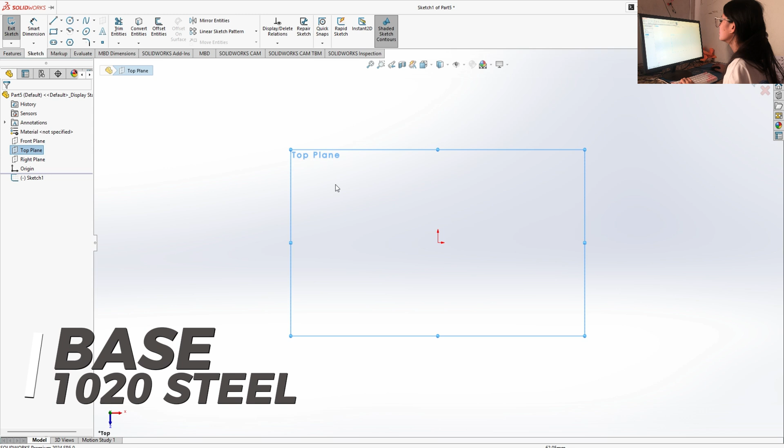First, we're going to select the top plane. Then sketch. Make a corner rectangle from the origin with a length of 56 mm and a width of 112 mm. Then extrude that part to blind, then 14 mm. Click enter.

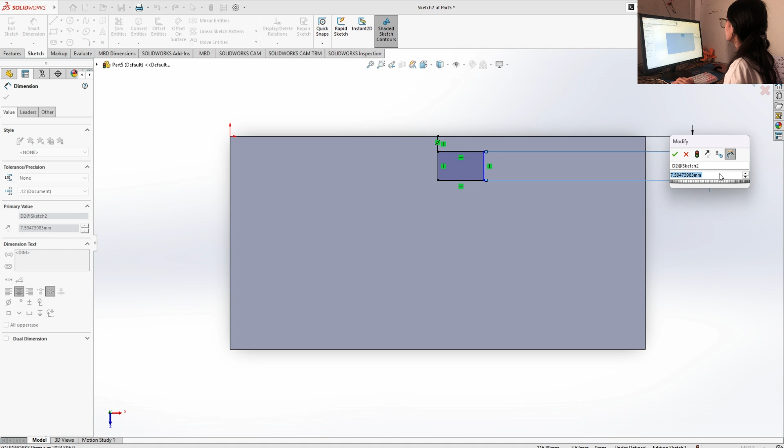Then we're going to sketch at the top surface of that rectangle. Make a little line with a dimension of 4 mm. Then make another corner rectangle with a length of 8 mm naman. Then we're going to extrude that part again to 14 mm.

Sketch on the front surface. We're going to ... natin ng konti yung perspective. Then we're going to make a line, a vertical line, yung haba niya is 78 mm. Then we're going to make a circle at the end of that line with a diameter of 56 mm.

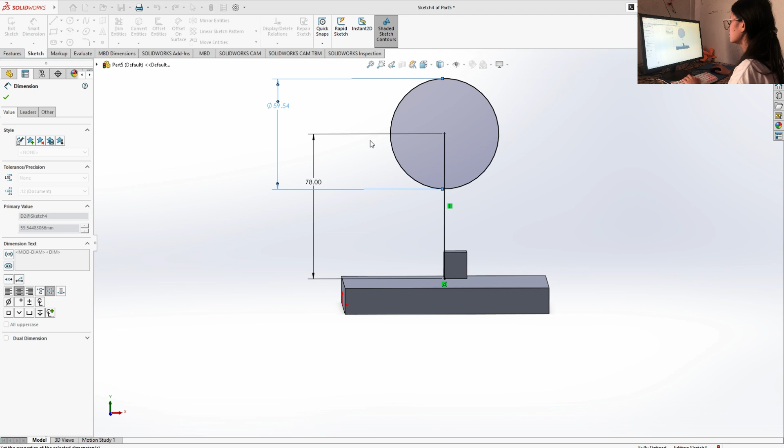Then we're going to make a line up to the end of our extruded rectangle kanina. Yan, 56, 56, both. Hanggang end, dapat mag-equal siya. And dapat sagad siya dun sa surface. If hindi, mali yung dimension mo. Then we're going to connect that to our circle. Make sure na may relationship sila na tangent. Yan.

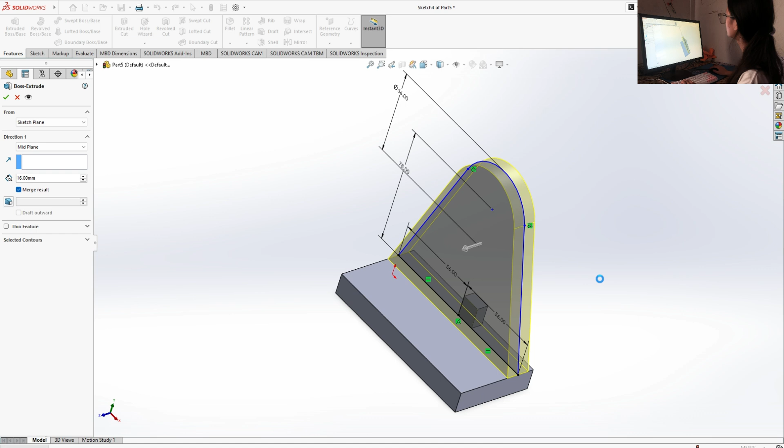Then trim natin yung mga nasa gitna, yung mga necessary parts. We're going to extrude now that part mid-plane. Ayan, 16 mm. Then click enter na. We're going to sketch again on the front. Make a circle up to that center. Then extrude that part to 5 mm blind.

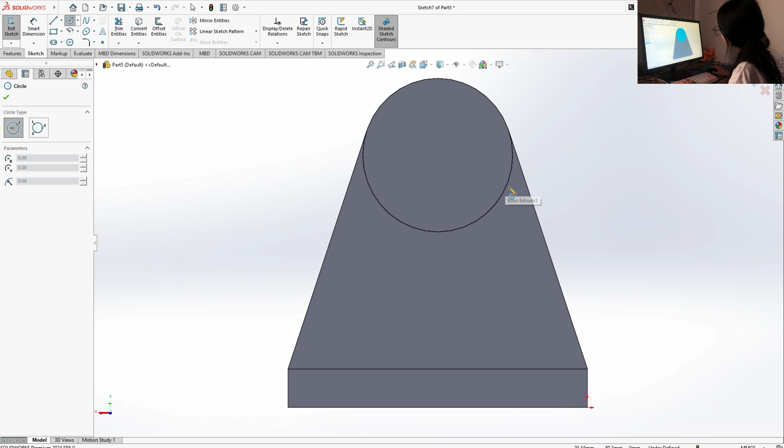Again, yung sa likod naman, make a circle again. There, we're going to extrude that part ulit to 5 mm. Then we're going to sketch again dun sa bilog na ating in-extrude. Ayan. From the midpoint, make a circle again, a small circle with a diameter of 25 mm. Then we're going to extrude cut, bubutasan natin siya, so ito through all natin.

Then, punta na tayo sa, ayan, dyan sa plane na yan. We're going to sketch yung sa baba. Then, may length siya na 56 mm. Then from yan sa baba, meron ulit siyang haba na 32 mm. Ang gagawin natin dito is yung nasa gitna ng ating base. Yan.

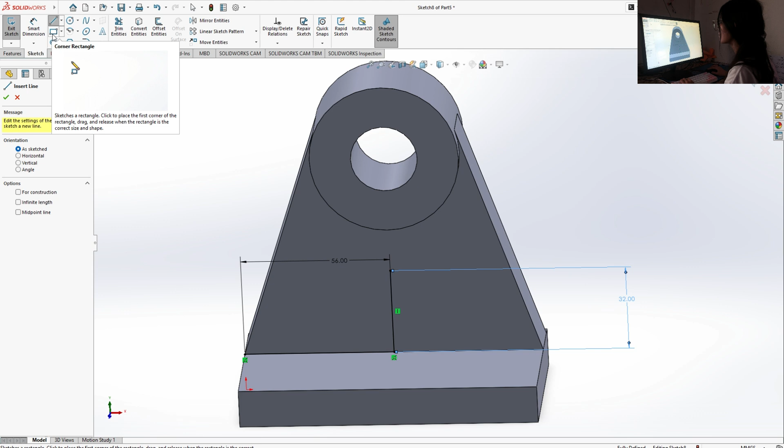Going to make a line. Yung sa kabila din, we're going to make a line that resembles a rectangle. Ayan. Then, lalagyan natin siya ng dimension. 6 mm for the width. Pareho. Then, trim that part, yung gitna. We're going to extrude that now to 36 mm. Ayan. And click enter.

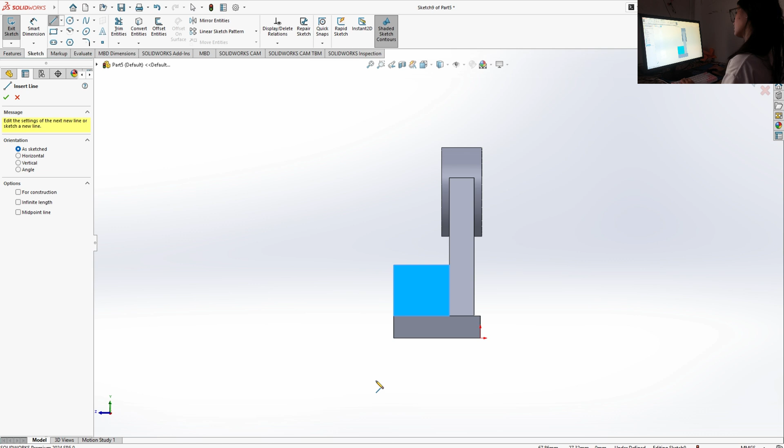We're going to sketch dun sa right side ng ating in-extrude para magawa natin yung parang triangle. Yan. Sketch. Buuin natin yung triangle para ma-extrude natin yung part na yun. Through all ulit. Ayan. Then, magbubutas na tayo sa taas na part. Sketch again.

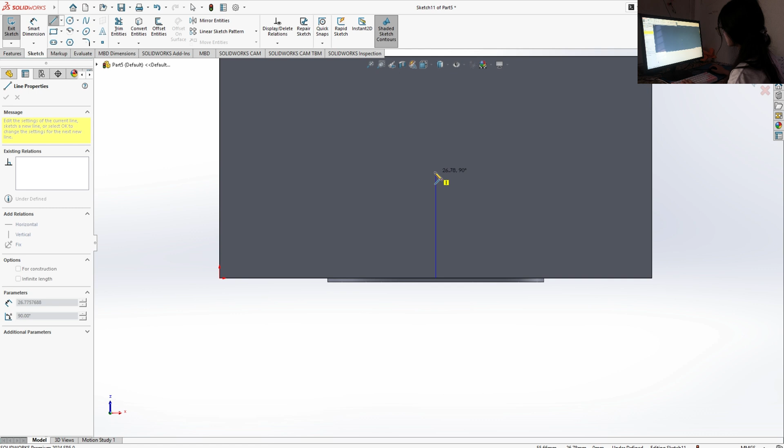Then, going to make a line. Yan, nahanap natin yung mid. Hanapin mo yung midpoint. Yan. Make a line there, with a length of 38 mm. Then, this length naman is 44 mm pareho.

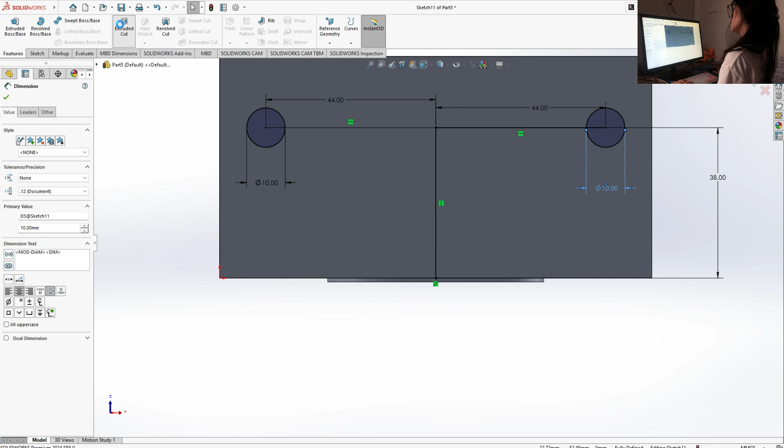Hindi pa pala tayo magbubutas. Magbubutas muna tayo sa baba bago sa taas. Ganyan. Yung dalawang baba, yung butas niya is 10 in diameter pareho. Yan. Then we're going to extrude cut that part again through all para mabutasan. Yan.

Yan, pumunta na tayo sa top plane. Bubutasan na natin yung taas. Again, sketch. Make a line. Make a line, then ang haba niya is 13 mm. Then make a circle na, yung maliit lang, with a diameter of

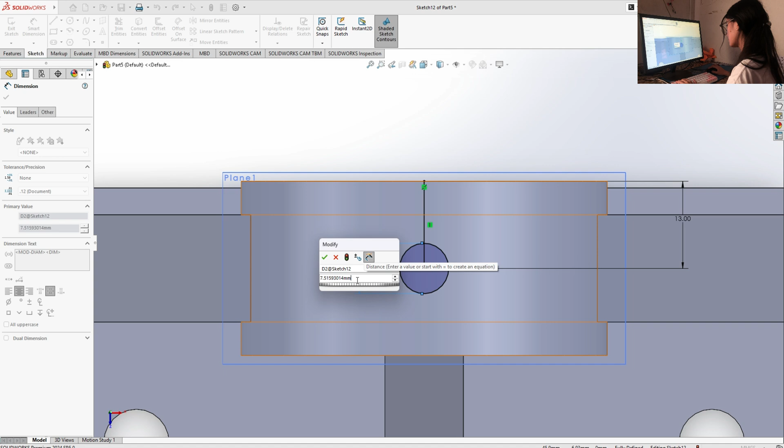8 mm. Ayan. And we're going to extrude cut that, not through all, only up to next, para hindi mabutas hanggang baba ng ating base. Ayan. Hanggang dun lang siya pag up to next. Then we're going to fillet, 3 mm radius. Make sure na 3 mm yung ating size ng fillet.

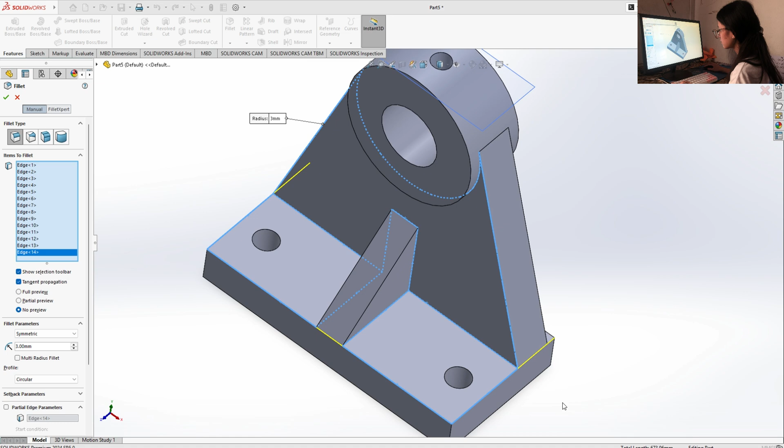And yan, click all the parts that need the fillet. Ayan, yung mga edges. Make sure na wala tayong makakaligtaan. Don't forget the back of our base.

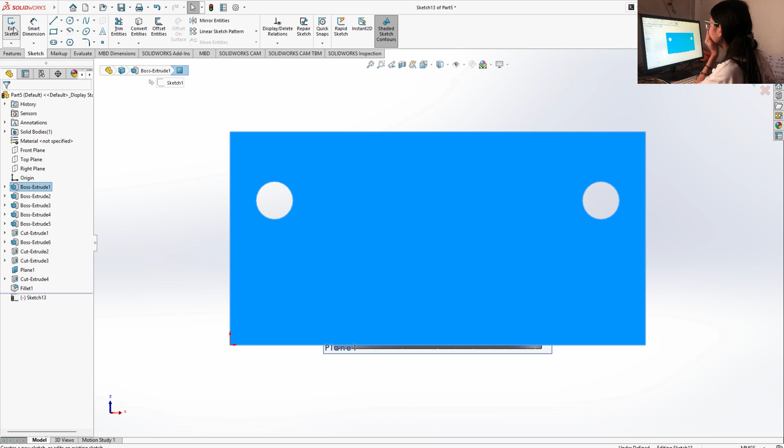Ayan. Then now we're going to make a dimension again sa ilalim ng ating base. Going to create a line from both ends. Meron siyang haba na 22 mm pareho at both sides. Then we're going to make a corner rectangle. Ayan. End to end siya nung ginawa nating line.

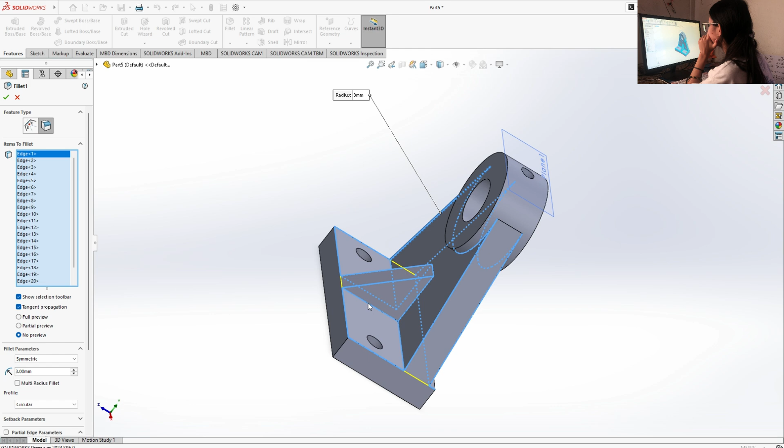Then we're going to extrude cut that part blind. Papalitan natin siya ng blind and 3 mm only. Ayan, ganyan dapat ang magiging itsura niya. And then I'm going to edit the fillet part kasi I'm going to add a fillet. Hindi ko na ma-edit yung fillet since hindi nakasama yung ginawa natin.

Kaya I recommend na gawin muna lahat yung needed parts before doing fillets. Ayan. So, we're going to fillet yung ilalim niya.

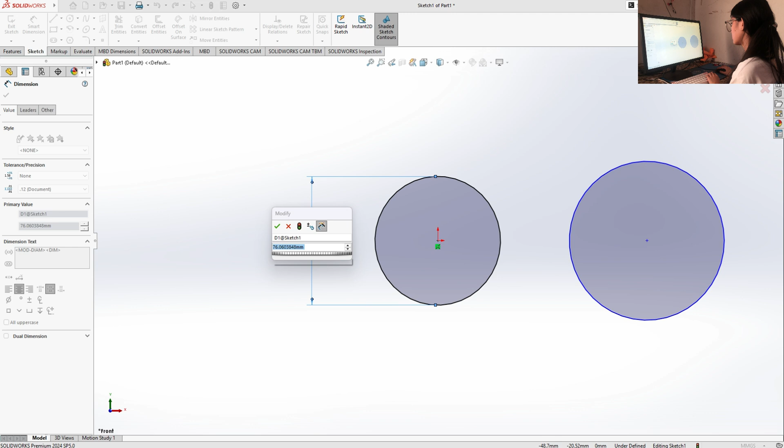Yan na. Now, to start the pulley arm, click the front plane again, then make two circles at the origin. The first circle should have a diameter of 52 mm. The other circle has a diameter of 56 mm. Then connect the top center of those two circles, pati also yung baba.

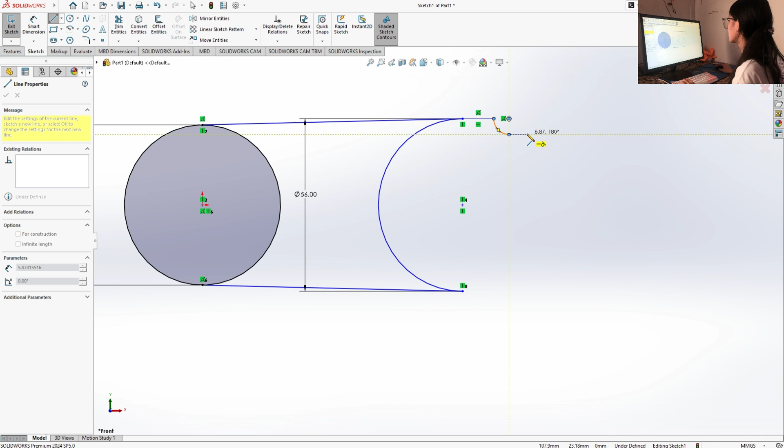Yan ulit. Then, yung baba rin. Connect those. Then, trim the half part of the second circle, yung mas malaking circle. Then, we shape this, follow this sketch to shape yung tabi nun. Then, yan. Click A for arc. Then, A again for the arc.

Then, after that, we put a relationship between those two lines. We make them equal. These two also equal. Then we can now smart dimension it. From this point up to this point, the arc should have a 4 mm length. This one has a 48 mm length.

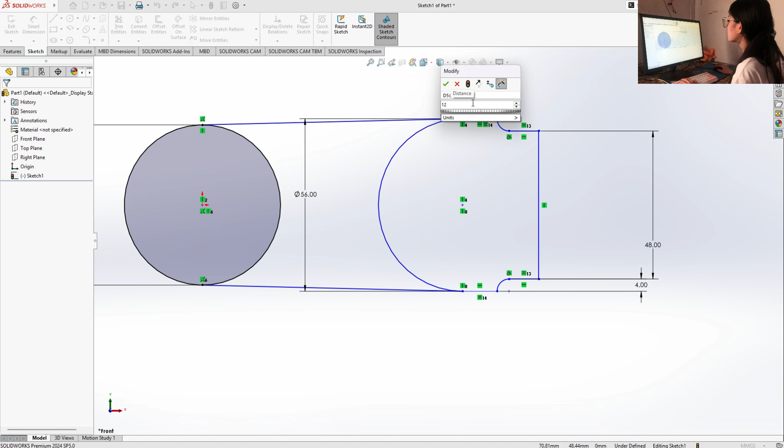This part will have... medyo naglag. So this part will have 12 mm length. See that nag-adjust din yung sa baba since they have an equal relationship. So the other one is 26 mm. After that,

I'll put another circle at the center line with a 25 mm diameter. A center line upon that point to the end line, and I make a line up in between of the center line. So yung layo nila is 2 mm, both lines from the center line, 2 mm up to center line. Then I'll trim those unnecessary parts, shape of pulley arm.

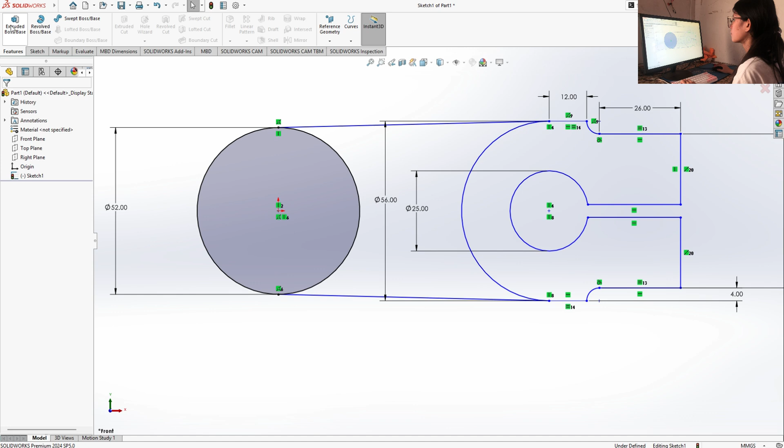Then I can now extrude this part by 6 mm. 6 mm yan. Then check the direction 2, then also 32 mm. Both are in blind. Then the center part, blind it, reverse that part. It is blind in reverse. Extrude it at 14 mm.

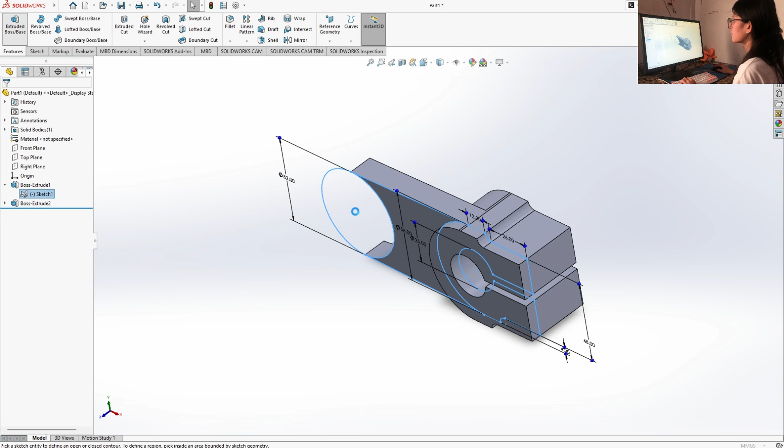Then yung unang circle, extrude it to 6 mm naman. For direction 2 is 20 mm, yung kabilang side. Don't forget that. Then, on the first circle, I'll sketch a circle with a diameter of 25 mm. Then, I'll extrude cut that part through all. Bubutasan ko siya. Yan.

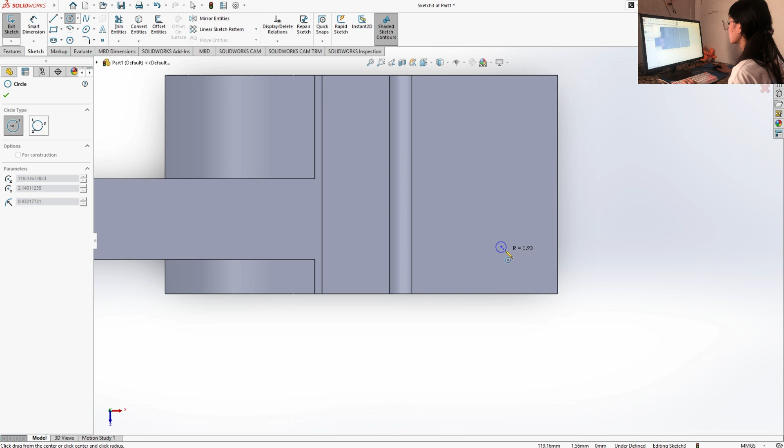Then, I'll sketch on this part of our pulley. I'll make a circle in there with a diameter of 12.22 mm, and yung layo nila is 12 mm. Yung layo sa baba is 14 mm, yung height niya 14 mm, yung width niya is 12 mm. Then bubutasan ko ulit siya, extrude cut through all. Yan, butas siya hanggang sa baba.

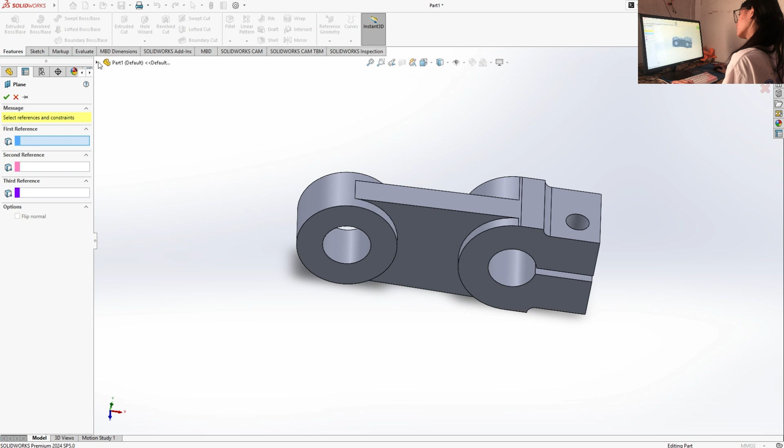Then, I'll go to sa ibang plane naman, sa right plane. Then, I'll sketch on this part. Maglalagay ako ng circle. Bubutasan ko yung gitna niya. May diameter siyang 8 mm. At yung height, yung distance niya is 13 mm, yung layo niya dun sa right side. So, ayan. Extrude cut na, up to next, para hindi butas hanggang dulo.

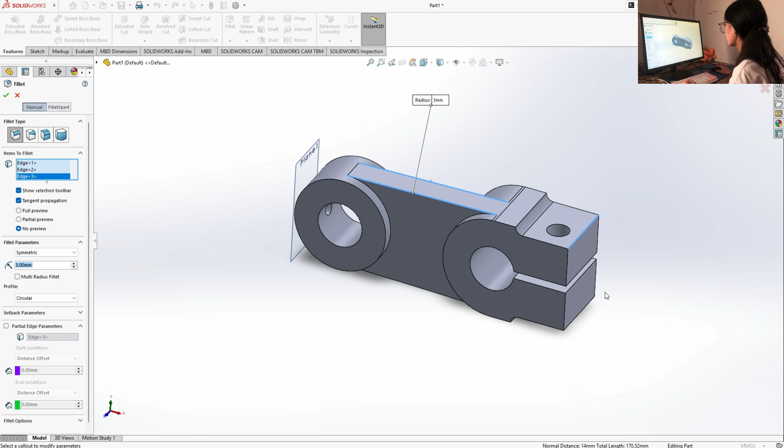Then, we can now fillet yung mga part na yan. Again, 3 mm yung fillet niya. Make sure na wala tayong makaligtaang fillet. Ayan. If you make sure na okay na, click enter or check.

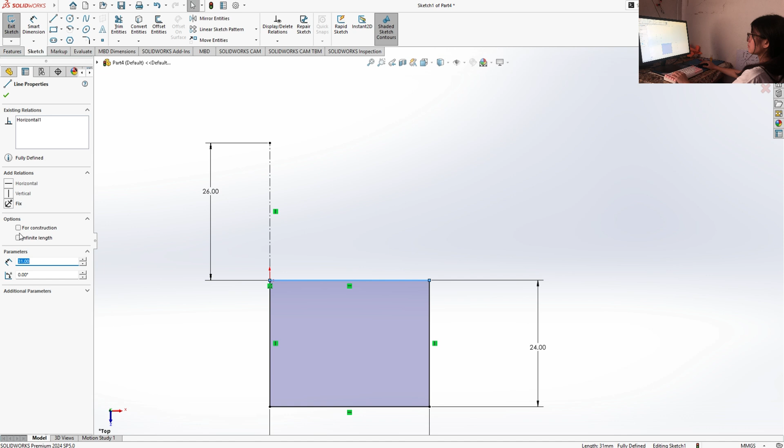For our third component, a pulley, we're going to start at the top plane. Again, make a corner rectangle. May length siya na 24 mm and the width of 31 mm. Ganyan dapat siya from the origin. Then, make a center line up from the origin, a vertical line with a length of 26 mm naman. Then, yung taas ng line na yan, we're going to make it for construction. Make it as a center line.

Then, offset that part by 10 mm. Then, I'm going to trim this unnecessary part sa loob. Then, that part, I also make that a construction line. Yung layo dapat nila is 10 mm. Going to insert a line. Just follow this sketch muna. This will serve as the outline as we revolve our pulley.

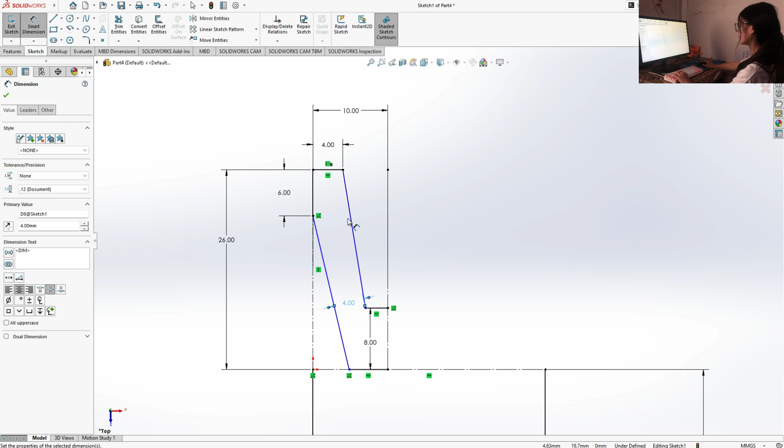Then, 6 mm, 4 mm. For that is 8 mm. And this inclined line, the distance between the two inclined lines is 4 mm. And the inclined angle should be 15. I'm going to mirror that part. And click check.

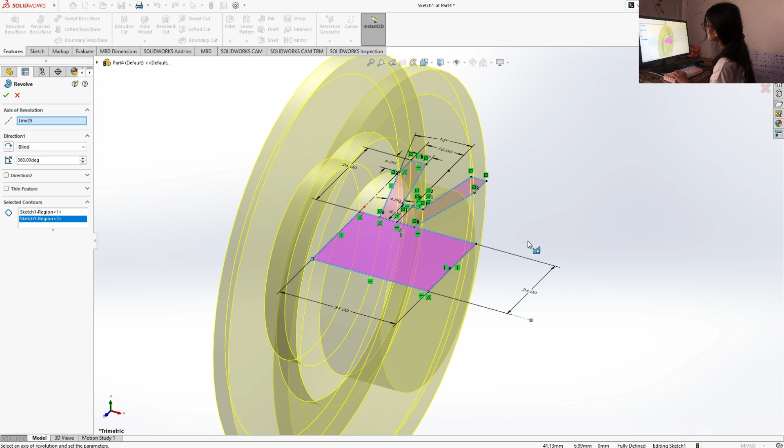I'll make a center line again. That will serve as my axis para ma-revolve ko yung ginawa kong sketch. So, yan yung end output ng aking ginawang sketch. Then, sketch on that part. Make a circle. Bubutasan natin siya. 30 diameter. Through all. Again. Butas na siya.

Should look like this. Then, we're going to fillet na. 3 mm ang ating fillet. Again, ganyan.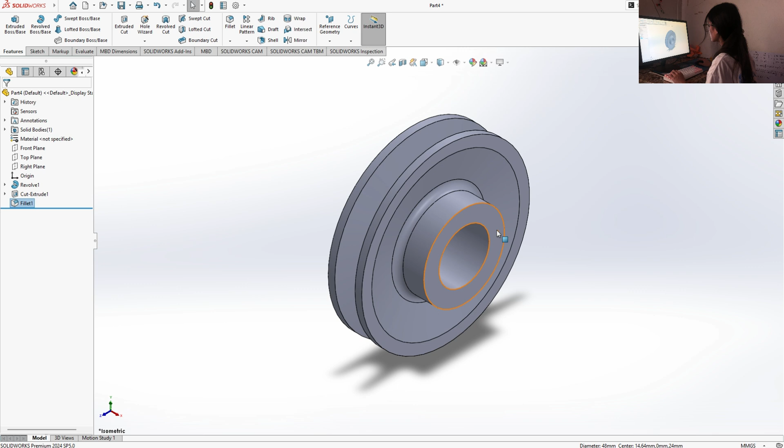Create at the front plane and make a circle from the origin with a diameter of 44 mm. Then we're going to extrude that part to 16 mm blind. Sketch on this part. Make a circle again, a smaller circle with a diameter of 25 mm naman. Then we're going to extrude cut that part through all.

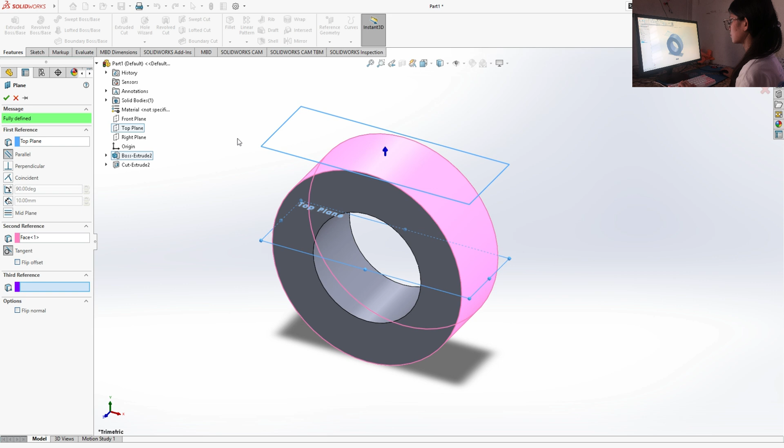Yan, para mabutasan natin. Then, punta tayo sa top plane. Sketch tayo sa top plane. Make a circle, yan sa gitna, with a diameter of 8 mm. Yung layo niya from the edge is 8 mm rin. Extrude cut that part up to next para hindi butas hanggang baba.

Then, we're going to chamfer that part instead of fillet. Only 1 mm in radius. This part. Those parts.

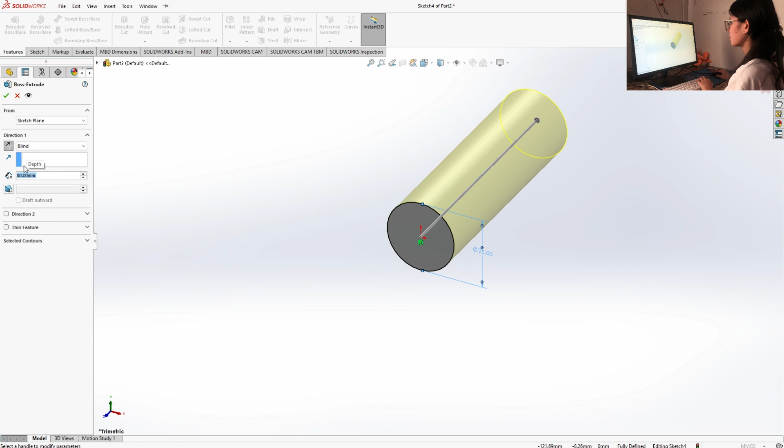Dito naman tayo sa arm shaft. First, punta tayo sa front plane. Make a circle, may diameter na 25 mm. Then, extrude that part. Blind. Ang haba niya is 80 mm. Then, after that, pupunta tayo sa top plane. Gagawin natin yung butas sa top plane.

Sketch on that part. Going to make a circle, yung may dimension siya na 8 mm only. Yung distance niya from the edge is 80 minus 67. You can type that na, if ayaw mo muna mag-compute.

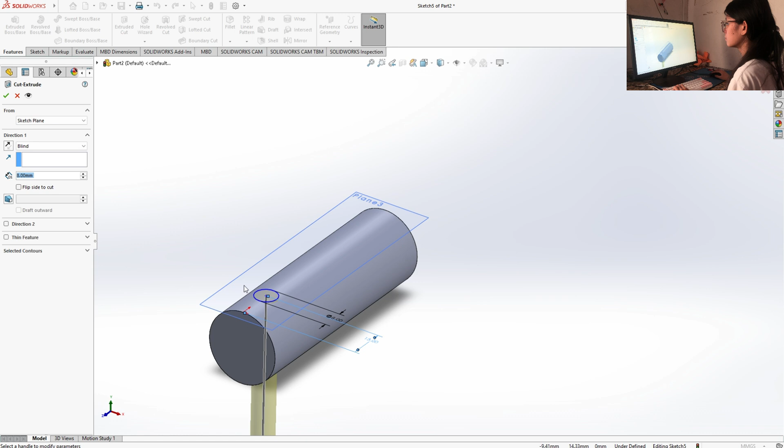Bubutasan na natin siya. Extrude cut, blind 8 mm only. Hindi pala siya sagad yung butas niya. Then chamfer na 1 mm yung magkabilang dulo ng ating arm shaft.

Doon naman tayo sa ating pulley shaft. Again, sa front plane tayo. We're going to make a circle, diameter ng 25 mm. Again, we're going to extrude that part. I-reverse natin siya, sa kabila tayo. May haba siya na...

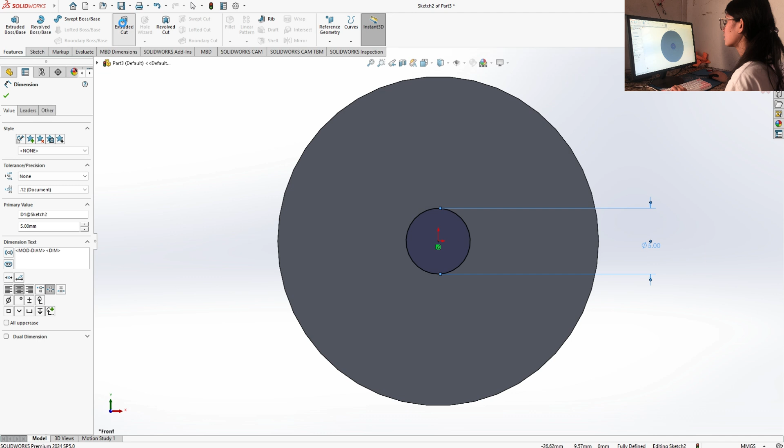And we're going to sketch na dun sa harapan ng circle. Make a small circle lang, and diameter niya is 5 mm only. Extrude cut that part. Hanggang 50 mm lang yung kanyang butas.

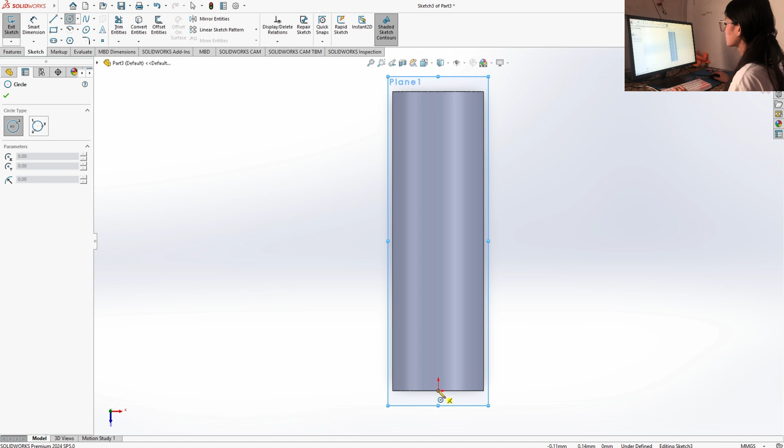Then, punta naman tayo sa top plane natin. Bubutas ulit tayo sa ating top plane. Sketch. Then, we're going to make a circle. Magkabilang dulo. Hanapin natin yung midpoint ng edge. Then, we can make a circle na may diameter na 8 mm, both.

Then, yung layo nila is 13 mm, na yung in between na distance nila is 54 mm. Then, we're going to extrude cut on those two circles to 6 mm only. Blind. Make sure it is in blind.

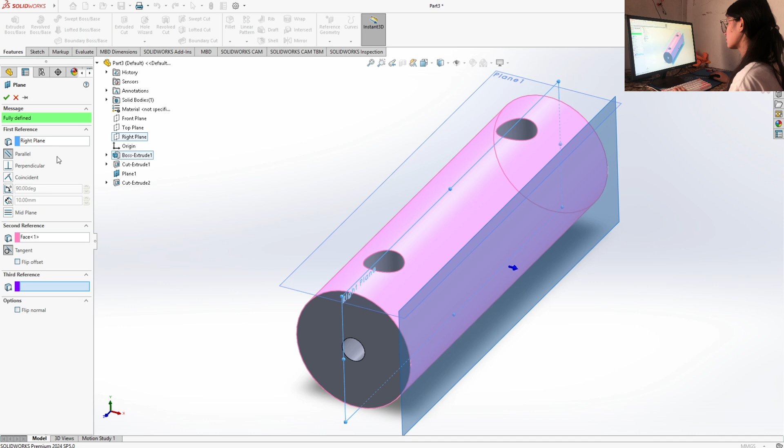Then, punta na tayo sa right plane. Sketch on that part and make a circle. Isang circle lang, may diameter na 5 mm siya. Yung distance niya from that edge is 40 mm. Extrude cut, blind 14 mm.

Chamfer natin yung magkabilang edge ulit ng ating pulley shaft.

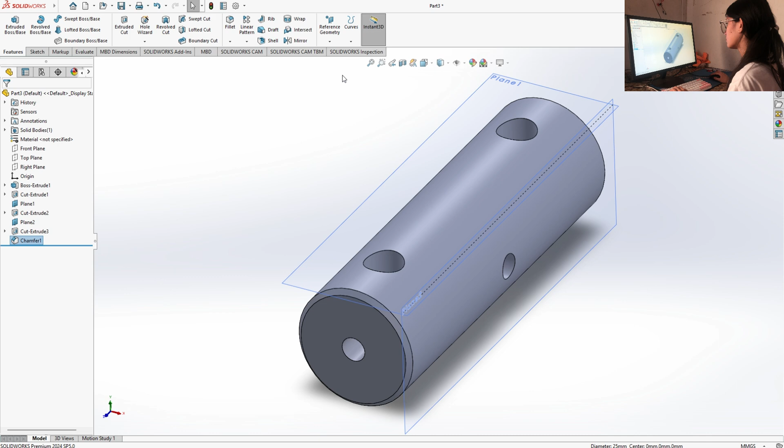Let's move on to our 7th component called bushing. Sa front plane, make a circle. Another circle sa gitna, yung smaller circle. Yung outer circle, may diameter siya na 30 mm, and then yung isa is 25 mm. And we're going to extrude that part. Dapat ganyan.

We're going to reverse the extrusion. Yung thickness niya is 31 mm only. Dapat nasa right siya.

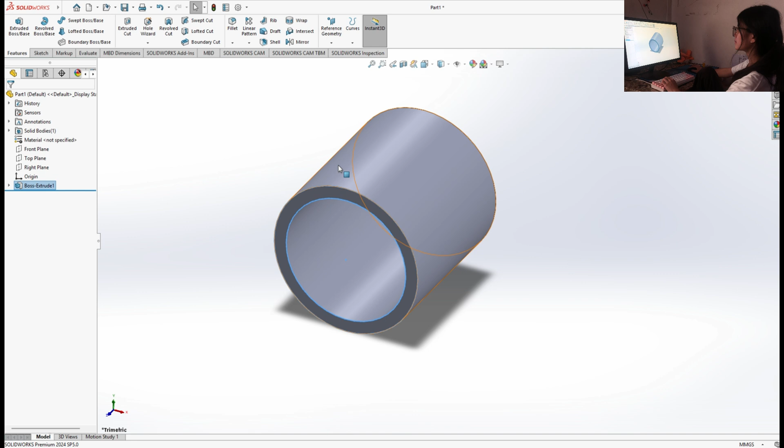Then, dito na tayo sa ating hex bolt, yung parang screw. Make that shape. Yung length niya is 20 mm. Extrude that part to 8 mm blind. Then, mag-sketch tayo dito sa front surface niya na circle, may diameter siyang 12 mm. Then, we're going to extrude that circle to 70 mm. Yan yung haba ng ating hex bolt.

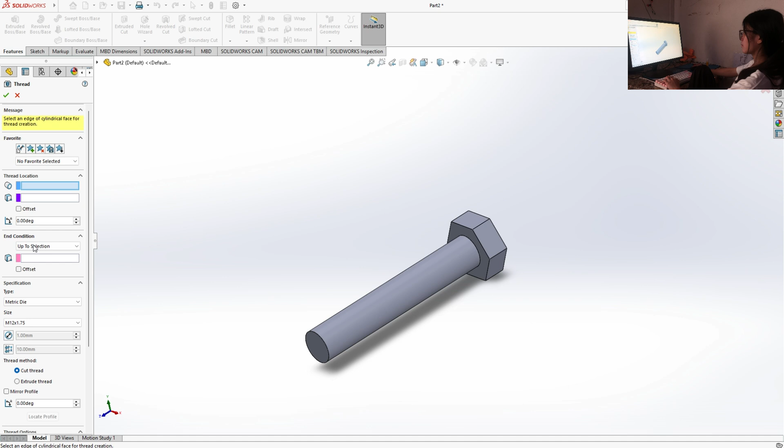Magta-thread na tayo. Make sure it is in metric die, kasi sa labas. Then, M12 by 1.75, yun yung kanyang size. Sa edge, click the edge for the blue part. Then, the pink part, yung end edge.

Naman tayo sa ating square nut. To start that, sketch tayo sa front plane. Make a center rectangle, and from the origin tayo lagi. Yung length niya is 20 mm, yung width niya is 20 mm. It's 20 by 20 mm. Extrude that part to 8 mm blind.

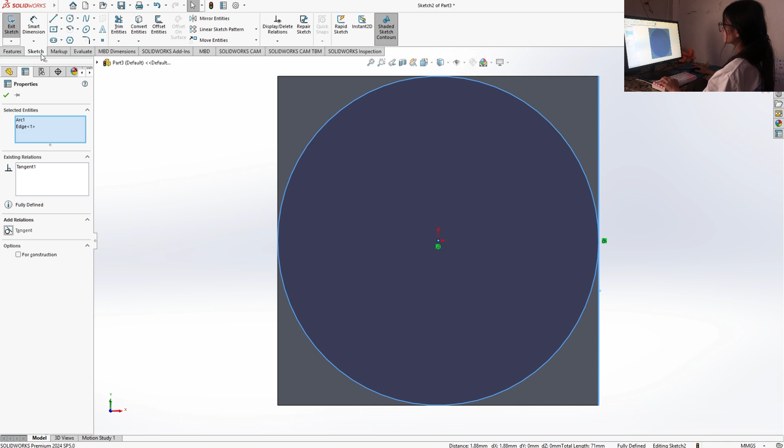We're going to sketch on this surface. Make a circle. Kailangan meron silang relationship na tangent, yung edge ng circle at yung edge ng in-extrude natin. Then, we're going to extrude that through all. Check natin yung flip side to cut para yung tabi lang yung matapyas. Then, make a circle dyan, maliit na circle, 12 mm in diameter. We're going to extrude cut that through all.

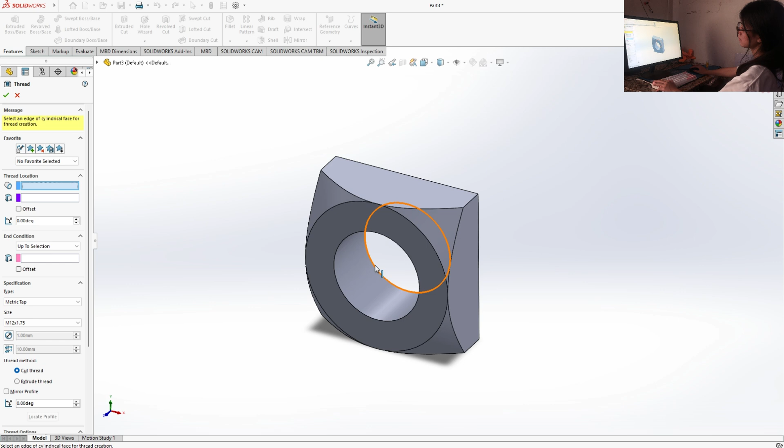Mabubutasan natin. Then, lalagyan natin ng thread yung loob. Metric tap, dapat sa loob. M12 by 1.75 ang size niya. And click both ends, yung top edge niya. I-offset natin siya ng 2 mm sa both start and end condition.

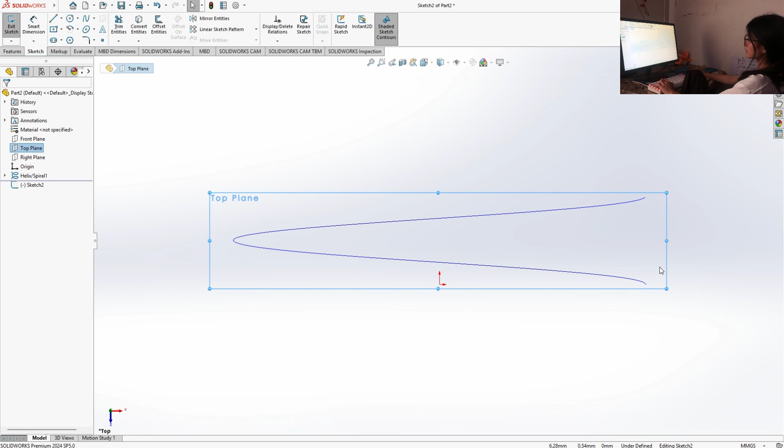Sunod naman natin yung ating lock washer sa front plane. Make a circle, may diameter na 12 mm. Then, make a curve dun sa features. Click the curve, check na. Punta tayo sa right plane. Sa top plane, then click sketch.

Make center rectangle. Yung width niya is 4.5 mm. Yung height niya is 2.5 mm. Add relationship. Search natin yung add relationship. Click.

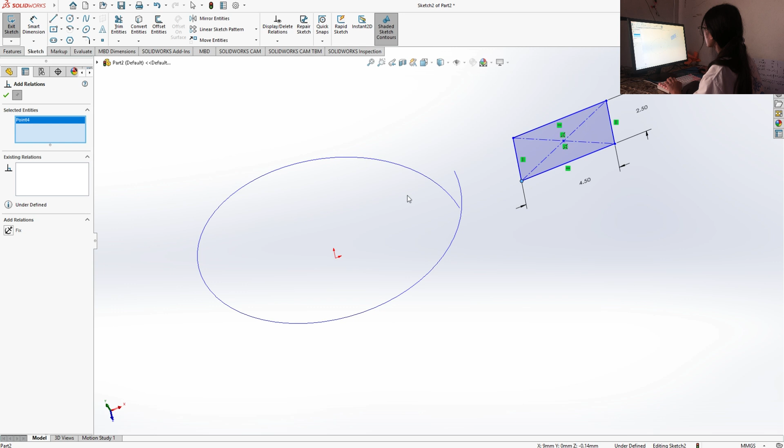Click those, then check. May relationship na sila. That point up to that edge. Check, dapat ganyan ang magiging itsura niya.

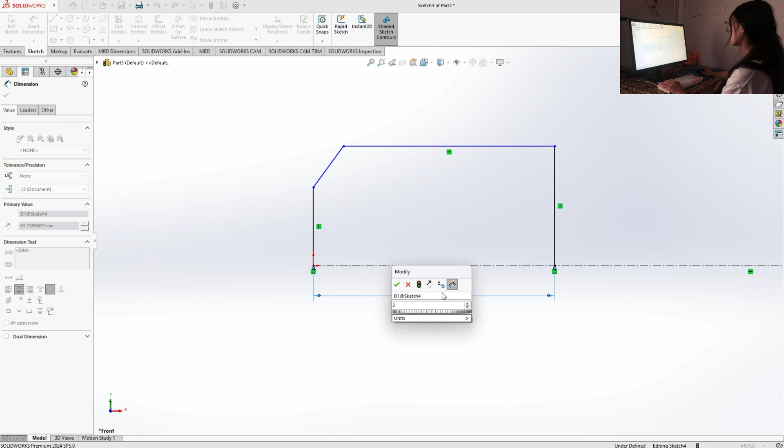Make a center line, horizontal center line. Then follow this outline sketch. Yung dimension niya up to that, from that up to that is 22 mm. Then 25 mm, 2.5 mm yung ang haba naman nito is 3 mm. Then this part is 4 mm.

We can now revolve it. Ganyan magiging kinalabasan niya. Click check. Then we're going to sketch sa ilalim ng hexagon.

Yung dimension niya, yung haba niya is 5 mm. Extrude cut that part to 2 mm blind. Click check. And punta naman tayo sa thread na.

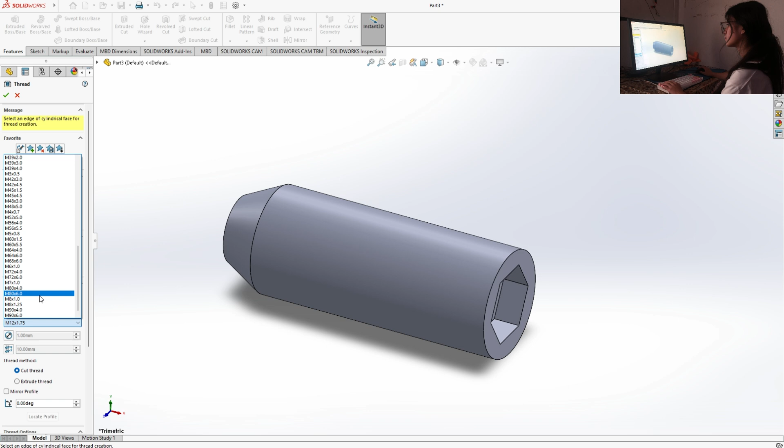Metric die, kasi sa labas tayo. Yung size niya is M8 by 1.25. Para sa, click that. Para sa end naman is yung part na yan.

Itinry ko siya i-offset. Pero once I click check on the offset, magkakaroon din ng thread yung taas na part. Kaya tinagtag ko na siya. So it looks like that. Click check.

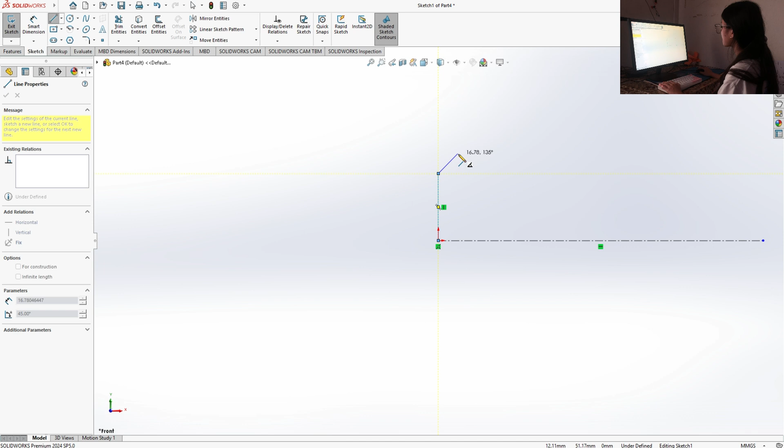Doon naman tayo sa mas maliit na hex bolt, yung 10 long hex bolt. Again, make a center line, a horizontal one. Then do that outline again. Kahit any size muna. Yung haba niya na is 10 mm.

Namali pa ako dyan sa part na yan, it should be 10 mm only. Then 2.5 yung length sa isang dulo. Then 4 mm dito sa kabilang dulo. Then yung inclined line is 3 mm yung haba niya. Okay na siya.

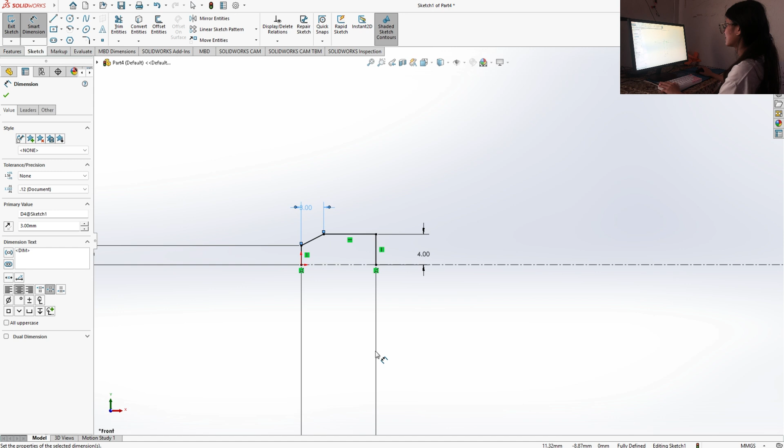Then we can now revolve. Again mag-i-sketch tayo din sa ilalim. Make a hexagon, then yung length niya is 5 mm ulit. Extrude cut that part to 2 mm blind.

Magta-thread na tayo, again metric die. M8 by 1.25. Click natin yung start at end na edge. Hindi na ulit tayo mag-offset, kasi ganun nangyari.

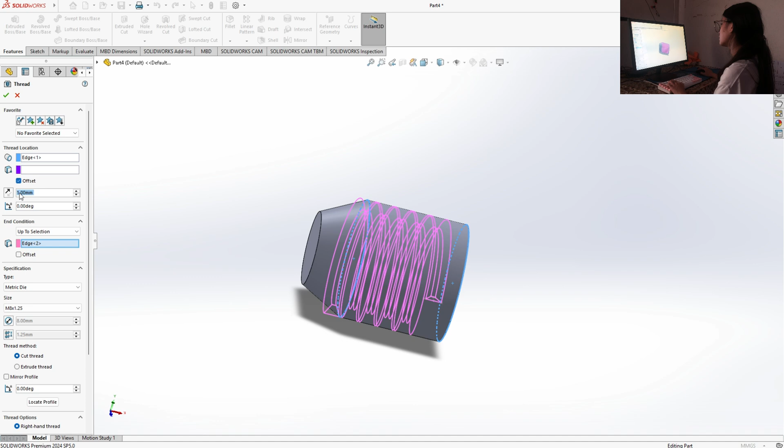Hinray ko ulit siya dito sa mas maliit and hindi ulit siya sumakto. Kaya inalis ko na lang ulit yung thread niya, yung offset niya pala.

Then we're on our last component, yung straight grease fitting. Start from making a center line, a vertical one. Then follow this outline again.

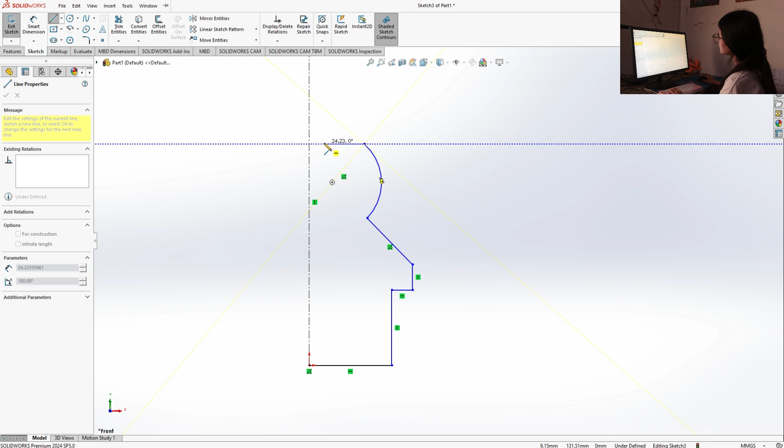Click A for arc. Make sure na magkapantay yung endpoints nila. Yung haba niya is 16.3 mm. Yung line na to is 4 mm. Then 1.25 mm, yung length nito is 6 mm. Then 1.5 mm, ito naman is 2.5 mm.

Make sure sa baba din para magpantay yung ating arc. Then ito naman is 4 mm. We can now revolve sa feature. Revolve that part, then click check.

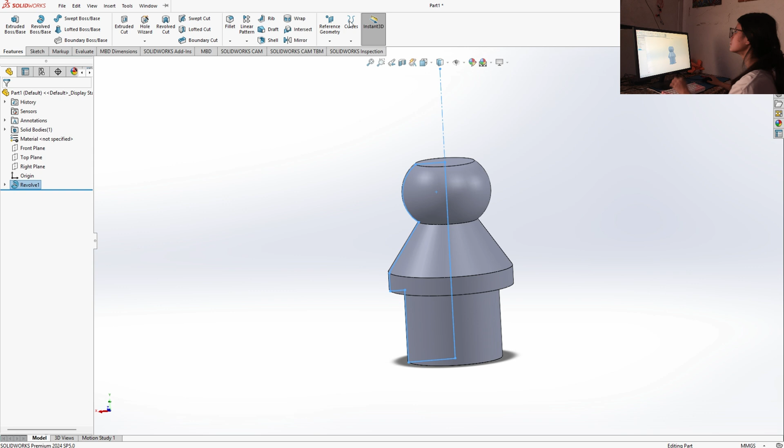Then we're going to chamfer yung edge, yung dulo ng ating straight grease fitting, 1 mm to 1 mm. Then ita-thread na natin siya, again metric die.

I-on na natin yung offset. Then M8 by 1 ang kanyang size. Click the edges. I-reverse natin yung offset nito. Click check, ayan ang itsura niya.

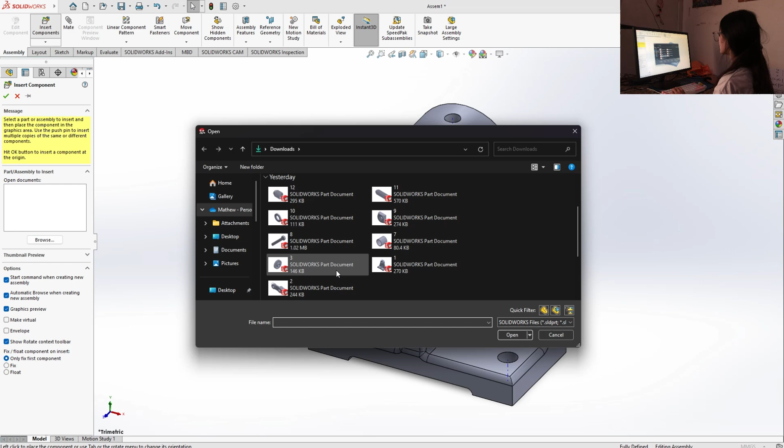Now we're going to assemble na yung ating ginawang components. To start with, ilagay natin yung 1, yung ating first component, yung base. Then insert component, the second component, i-rotate natin siya to match this look.

Then we're going to turn on the axis muna, huwag kalimutan. Then mate that part, yung axis ng base at yung second component. Mate, then coincident para magdikit sila. Then click check. Then we're going to insert another component, yung ating third component.

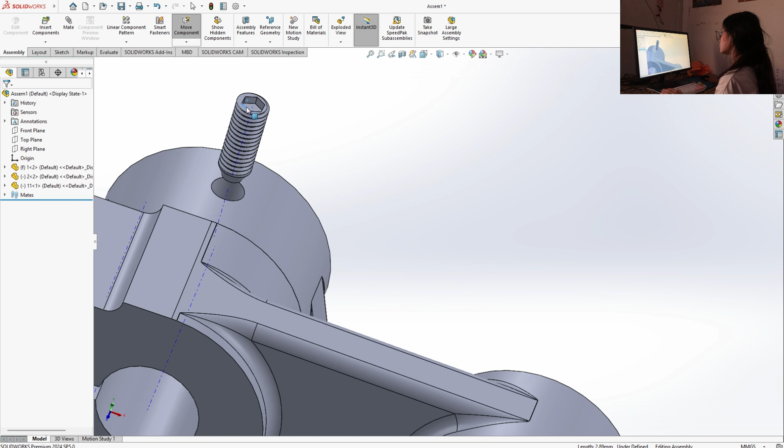Yung ating hex bolt. Rotate natin para tumayo. Then mate that axis, click natin yung axis nila. Then ibaba lang natin siya. Make sure na walang kitang nakaangat, kasi hindi ganun yung screw, diba?

And we're going to put this arm shaft. Rotate lang tayo ng rotate hanggang maging ganyan yung itsura niya. Then again we're going to click on the axis. Ay, may mali ako. Dapat inuna ko tong arm shaft bago tayo mag-screw.

Mali na tayo, I'm going to undo, Control Z, hanggang sa part na to lang. So I'm going to insert muna yung arm shaft. Insert the arm shaft, rotate. Going to mate this part.

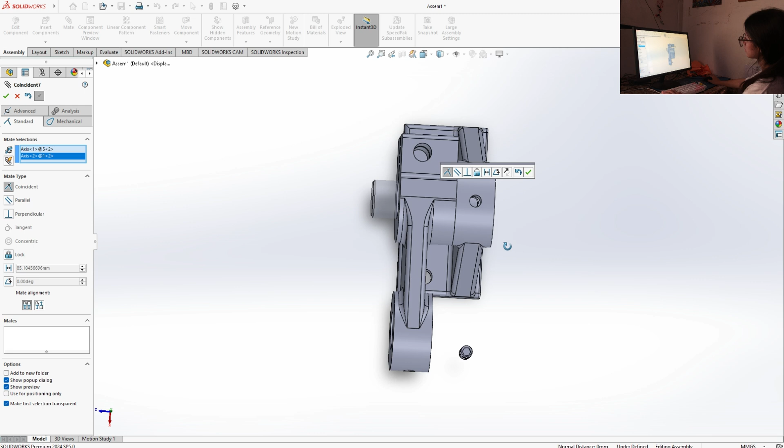Ilahin ko muna siya kasi hindi pantay yung dalawang butas niya. Then coincident ko yung dalawang circle, yung butas, para pantay siya. Then I can now mate this hex bolt, ibababa ko lamang siya. Again, make sure walang nakaangat.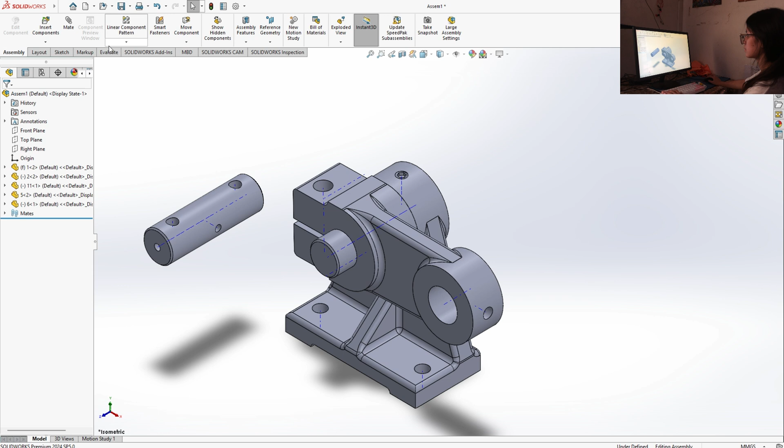Insert component na ako, ang next nating component is yung pulley shaft naman. Kamukha siya ng arm shaft, diba? We're going to coincident these two lines, these two circle, I mean. Click on their axis palagi, then mate. Click check.

Insert component again, we can now put another hex bolt, yung 22 long hex bolt. Mate those two, then ipasok lang natin siya.

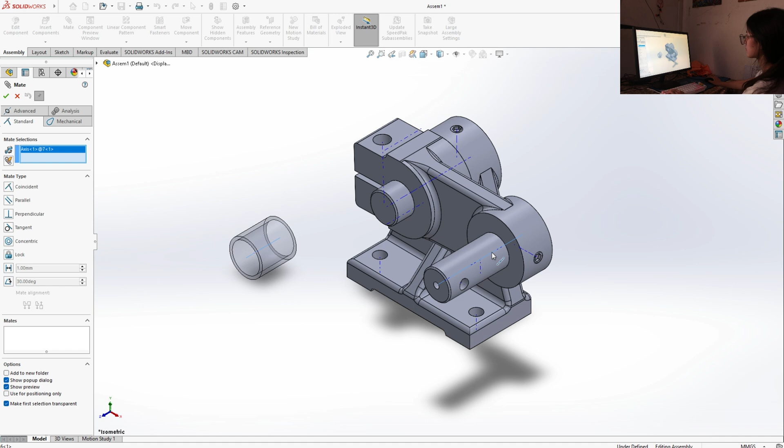Insert component. Doon naman tayo sa ating pulley shaft, and mate that part. Then coincident natin yung magkabilang edge surface nila para magdikit.

Doon na tayo, insert natin yung third component na ginawa natin. I-rotate natin, yung mas manipis na part dapat nakaharap sa atin. Mate that, then coincident, ilalapat natin yung end surface nila.

Then insert naman yung fourth component. Mate that. Iko-coincident muna pala natin para magsakto yung butas. Then we mate them, then click check.

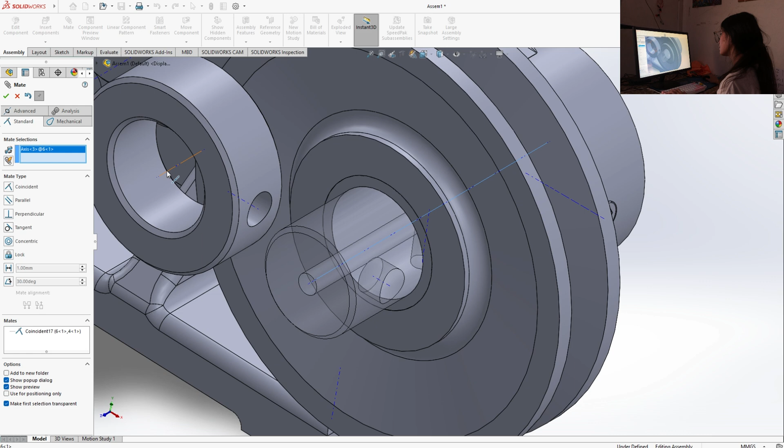We can now put another, yung last natin ginawa, which is the straight grease fitting. Rotate again. Then mate.

Notice na nasa loob siya, hindi ko siya makita, diba? Nag-try ako mag-coincident muna and nasa loob pa rin siya. So tinry ko siya ilagay dun sa kabilang side, sa right side ng ating assembly.

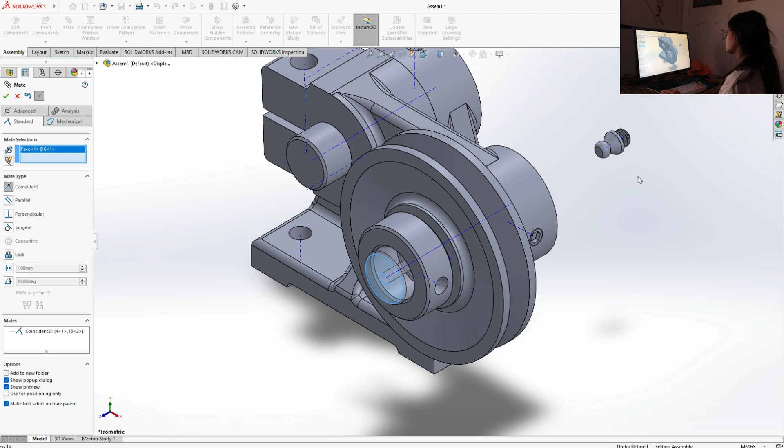Nirotate ko siya, then mate, coincident, then click check, then mate again, and coincident those surfaces. Lumapat na siya and kita na siya.

Then naman tayo sa ating screw na mahaba. Mate natin siya, click check, then coincident natin yung bottom part niyan para lumapat ulit. Then we're going to add yung 10 long na hex bolt.

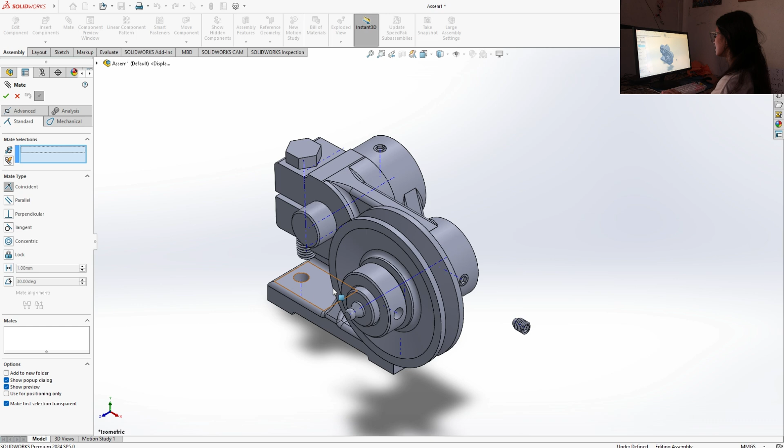I almost forgot that. Coincident up to that axis, click check. Then pasok lang natin siya ulit. Wala ulit dapat nakaangat. Nilulubog ko siya ng konti.

Then we're going to proceed na to insert our washer, yung lock washer natin. Rotate that. Then mate up to the axis ng screw. Itaas lang natin siya ng konti.

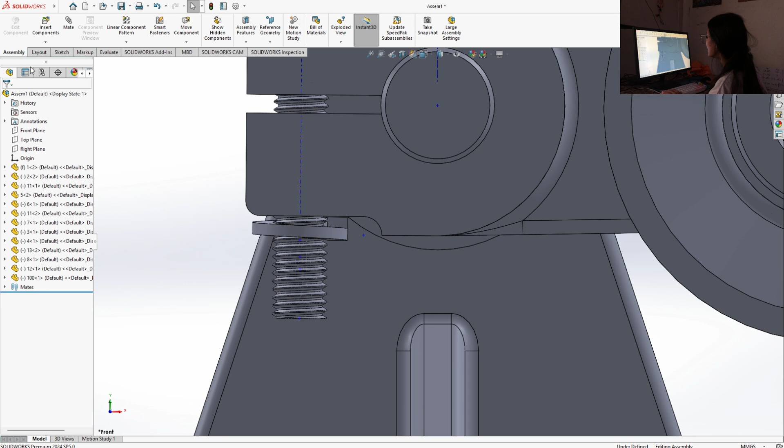Then last nating ilalagay is yung ating square nut. Dapat nakaganyan yung kanyang rotation. Then we're going to mate it with our screw again. Click check, taas lang natin ulit siya. Hindi ko siya masasagad kasi hindi pantay yung ating lock washer.

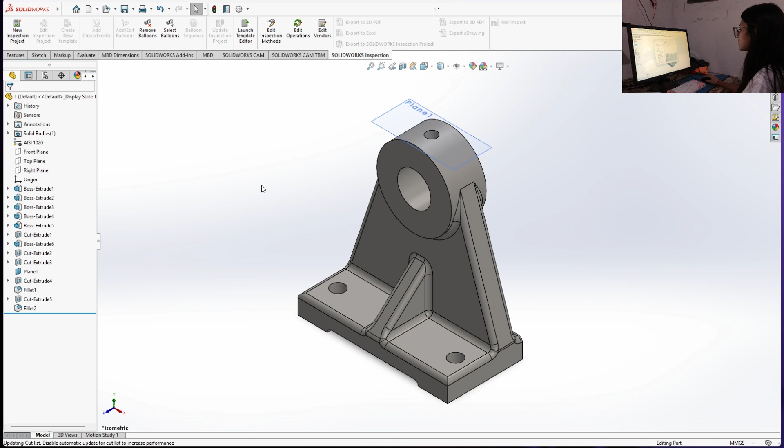So I almost forgot to add the materials. First, we're going to open a component. Then sa left, mayroon yung material not specified. Then right-click, then click the edit material. Ang i-apply natin is yung steel AISI 1020.

We're gonna do this step on each component na may indicated na material. So yung sa steel, we're gonna add this to the base, the regular lock washer, the grease fitting, straight grease fitting, the pulley arm, the pulley, collar, and yung dalawang hex socket set screw, yung mahaba and yung maikli. Also the arm shaft and the pulley shaft.

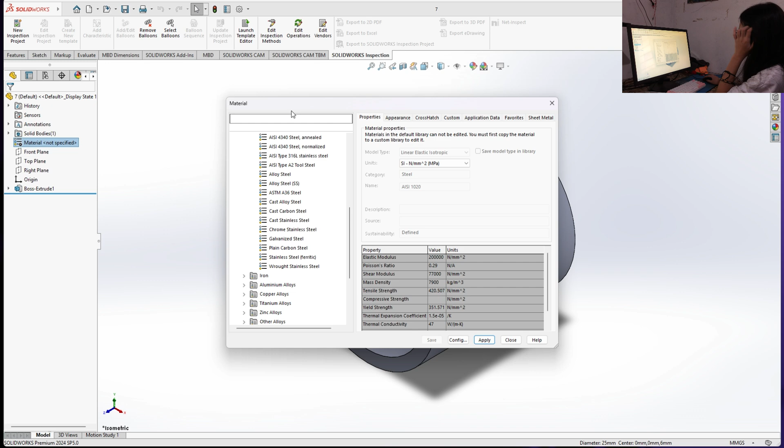Bushing, iba yung material niya. So you're just gonna type brass. Then apply it on the component.

Then the rest is steel. Pero merong dalawang component na walang indicated material, which is the hex bolt and the regular square nut. So hindi ko na din siya nilagyan ng material.

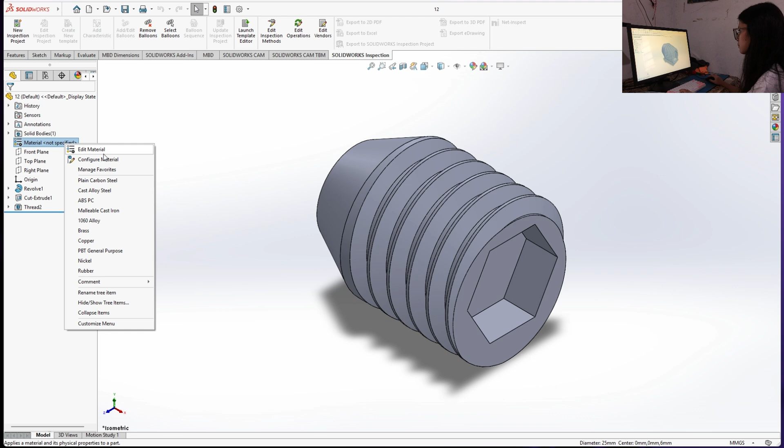Then we're gonna open yung assembled natin. Then click rebuild. Yung prompt na yun is mag-a-appear ng kanya. Then we just need to click the rebuild. Then yung mga nabago natin is mababago din doon sa assembled natin.

So in this part of the video, I'm just gonna make changes sa ating last assembly. Yung washer natin is mali yung position. So I deleted the hex bolt at yung washer.

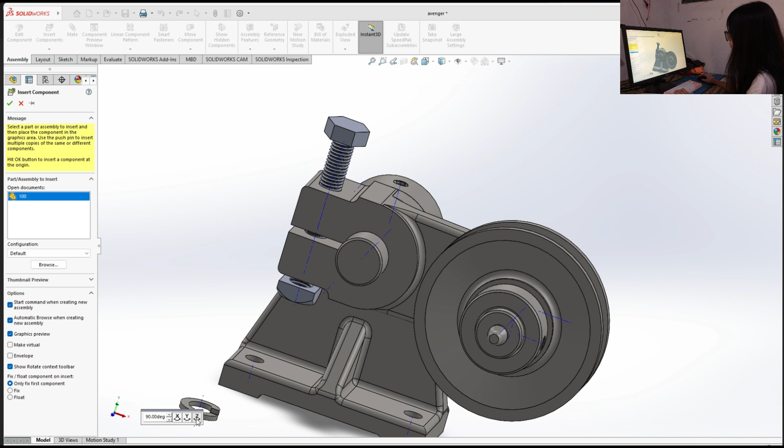Insert components. Insert ko ulit yung hex bolt. Ni-rotate ko and I mate the axis again. Insert component again, yun naman ang ating washer. Ni-rotate ko lang sa aking desired position, then mate the hex bolt and the washer again.

Napansin ko is yan yung right position niya once I check on the PDF again. Tinry ko i-coincident yung bottom surface at yung top surface pero hindi siya pwede. Kaya ang ginawa ko is binaba ko na lang yung washer together with the hex bolt.

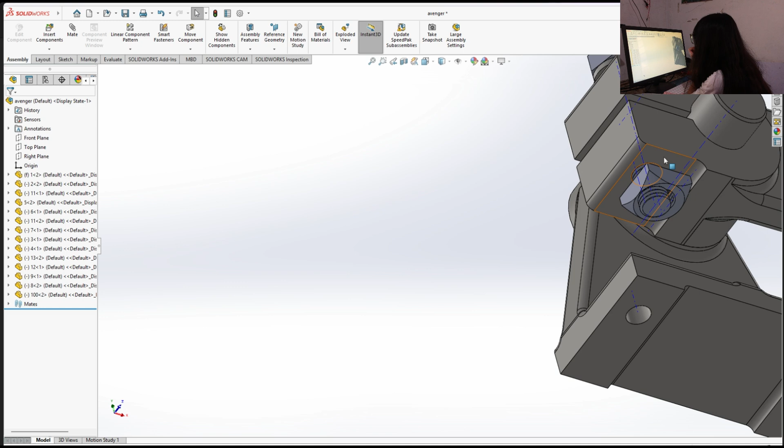Then inayos ko naman yung square nut. Kino-coincident ko yung bottom surface, then yung top surface ng square nut.

I just noticed in this part na tabingi yung, or sala yung pasok ng hex bolt sa square nut. Kaya tinry kong ibuin yung square nut pero it did not move. So I deleted that component.

Then insert another component para ma-edit ko siya. Rotate, papahiga ko lang. Then mate it again, yung axis ng hex bolt and yung square nut.

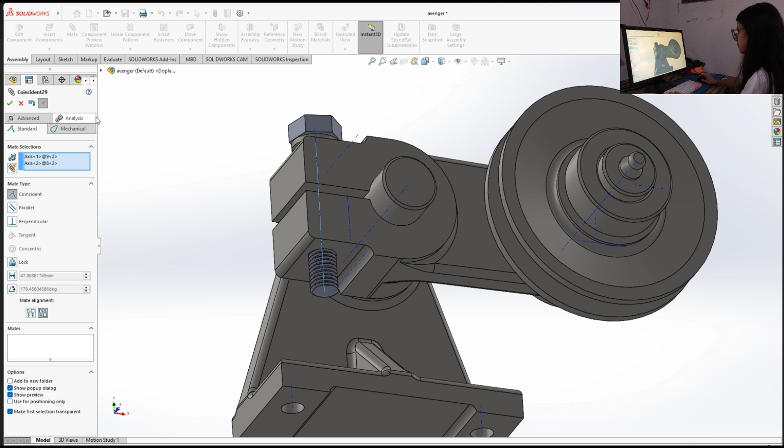Then i-coincident ko lang ulit para maglapat. Inikot ko lang, and that's it. That's our finished belt tensioner. Thank you for watching.